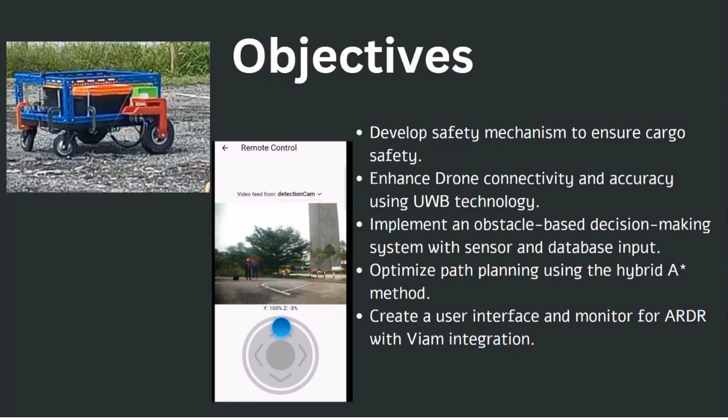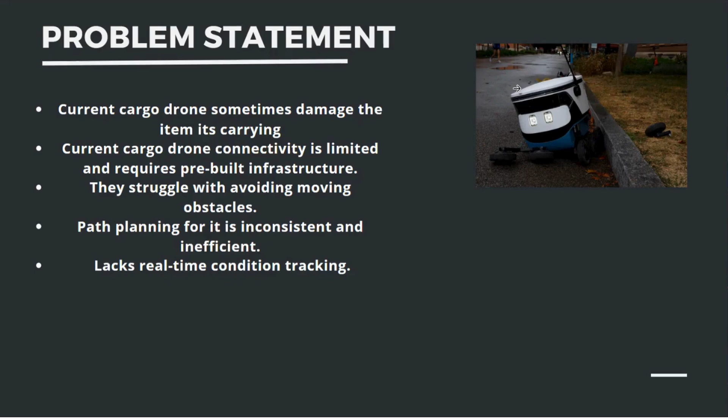The different problems that current cargo drones are currently facing: first, the items they carry sometimes face damages. Secondly, there is difficulty in terms of connectivity because sometimes it's limited. Third, they struggle to avoid dynamically moving obstacles. Fourth, path planning is sometimes inconsistent and inefficient. And lastly, it lacks real-time tracking for the different cargoes.

Let's look at the methods of how we're going to achieve this. We are going to use two UWBs to localize the location of the ARDR, and that information will be sent to the server through Mosquitto. We will then use MATLAB to path plan it, and that information will be sent back to the ARDR through Python.

The bot will move towards the location while it also detects obstacles using TensorFlow. All of this will be displayed using VIAM, Flutter, and Android Studio.

When it comes to the unique features of the land drone, we have four main unique features. Firstly, the mobile GUI, which we utilize via VIAM. The GUI provides something user-friendly, as well as easy and quick manual control of the land drone.

As for path planning, we've decided to use hybrid A-star path planning, which is a better algorithm compared to A-star, as we take into consideration the vehicle dimensions as well as capacity to plan the path taken.